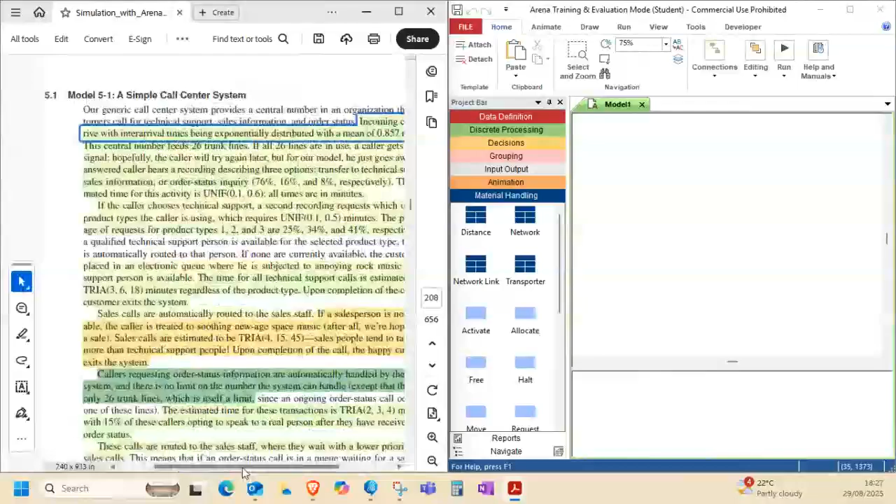So now we have what? Incoming calls - that's your arrival of products, create. And then these incoming calls arrive with interval times that are exponentially distributed with a mean of... So now, immediately I want to introduce something.

I want to start introducing expressions, whereby this is the expression in time. So now it's going to be in calls time - I'm introducing variables now. This is going to be calls time, and then your entity type is calls.

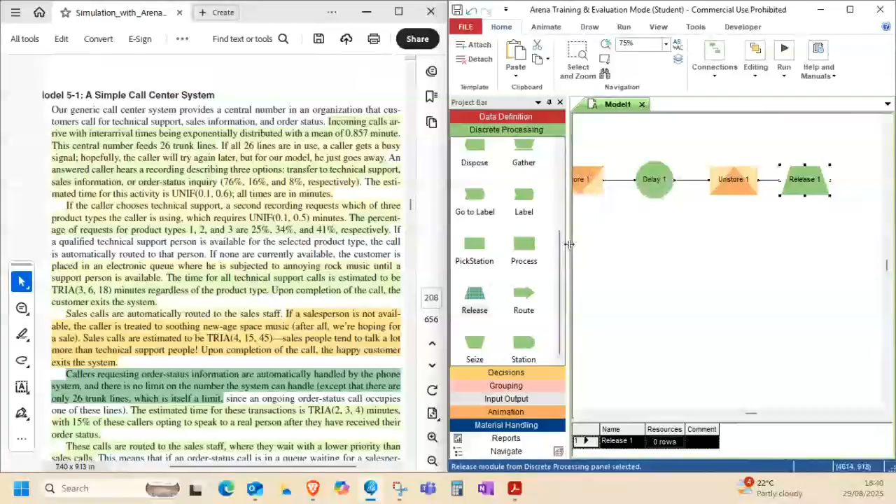...the entity so that it can move, or the resource so that it can move along. Okay, so now the system looks like this now. The system looks like this.

So now we seize the resource, which is the recording, and we're obviously making the assign, meaning usually they even change what they are assigning to be the work in progress. So they're going to assign the work in progress variable, and after that you actually don't need to depict this. You don't need even this assign.

I think it's pretty much over for now. But you seize, then you have the store, you store and you delay by playing the recording, and you unstore the choice the customer makes, and you release the resource, meaning release the entity so that it can go elsewhere. So where does the entity go?

The entity is going to, this section 76, 16, 8. So the entity is going to go under a decision.

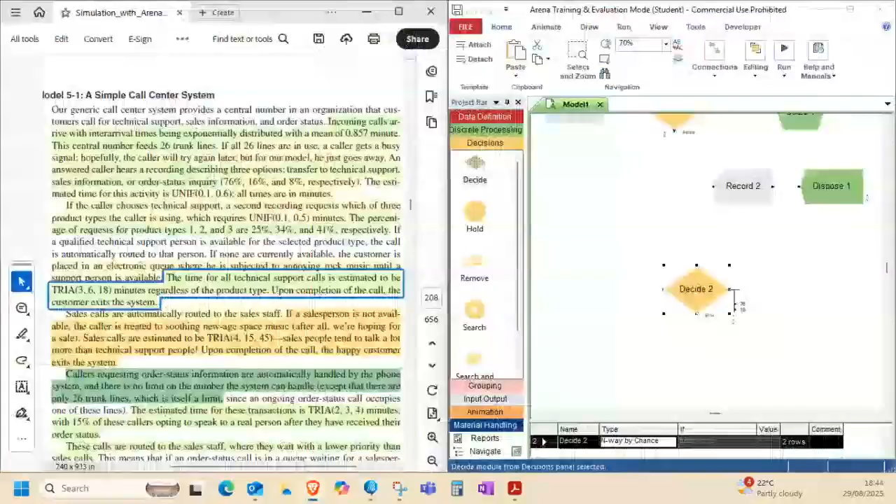Okay, now I need to be able to project to see and visualize how much you are seeing, because now our system looks like this. So we are going to connect it now. Connect to that, and connect there. So you see now we're going forward, and now from release we are going to this decision.

That's a decision we're going to next. So now I'm gonna go a little bit below like that, then I'm going to zoom. So we have this decision. We've only added this information. We never added anything there because we are reading now, we are just reading the question.

Once you can't come up with the flow chart, not that I'm gonna make it a difficult flow chart, once you can't come up with the flow chart, we are really in trouble. You need to appreciate that very quickly. Then now, after that, we are here.

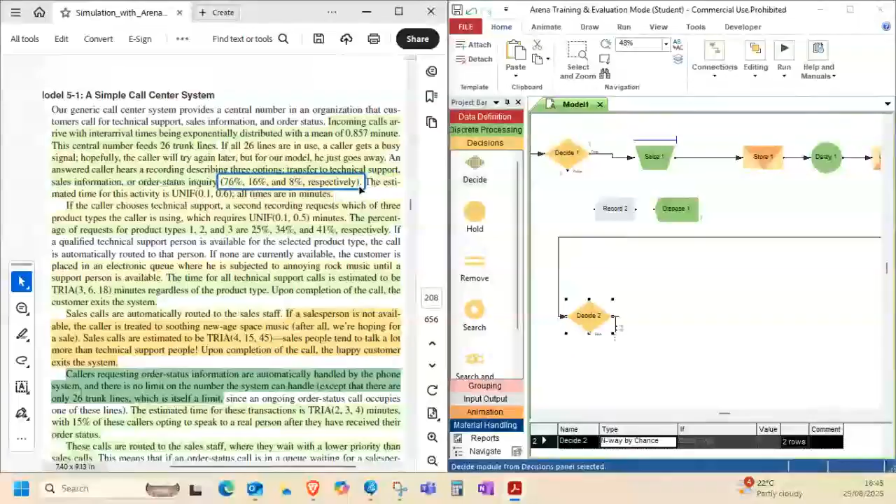We are going to, what is this process? The estimate time for this activity is uniform 0.1, 6, and 0.6. That comes here, it's this time here. It's going to be in minutes, you take uniform there.

0.1, 0.5, and okay, then the percent, okay, 0.1, 0.6. It's easy to make this mistake. Because you don't want to go back and forth, then it's best to fill it up like that.

Then you want to know something, that if the caller chooses technical support, I guess they're being delayed here and they're making a choice. That's why we are storing the choice that they're making, and we unstore it as soon as they've selected so that somebody else can make the similar choice.

If they select to go to technical, now there's another one. If they select to go to technical, then which of three, okay, if the caller chooses technical support, a second recording now starts. You see, so we are starting the similar sequence of event like that one.

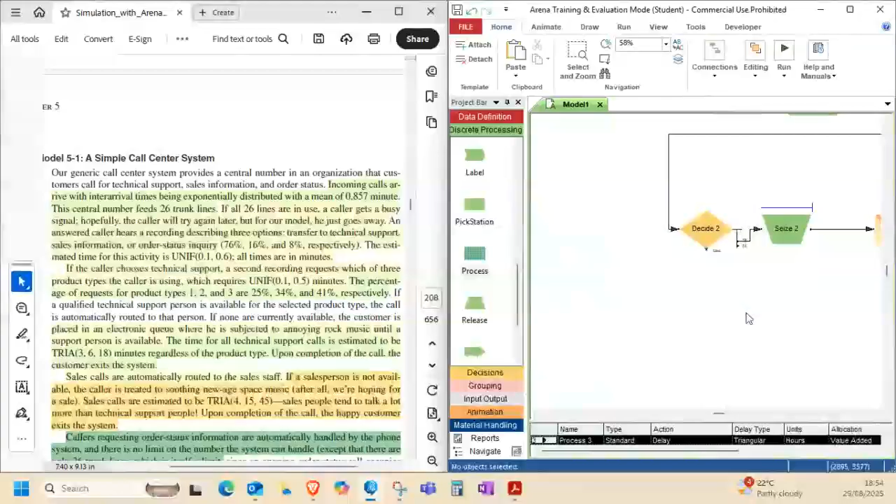Then we need to go to somebody else now. This one, 16. Agree, this one goes with that. This goes with this. This goes with that. Okay, now we want to go to the salesperson now, which is 16.

Salesperson, sales calls are automatically routed to the sales staff. If a sales is not available, the caller is treated to a soothing new-age space music. After all, we are hoping for a sale.

Sales calls are estimated to be in the triangular distribution of 4, 15, 45 minutes. Salespeople tend to talk a lot more than technical support people, those ones that just want to get the problem solved.

I agree, you want to just solve the problem, so we need to get rid of you and go. But under sales, we must give you an upgrade right there to tell you the features and stuff like that. We lie to you until you buy, and we add another watch on top of your phone, saying take your watch also. So make sure you don't go home in peace, you must buy something extra on top of that. So they need a lot of time.

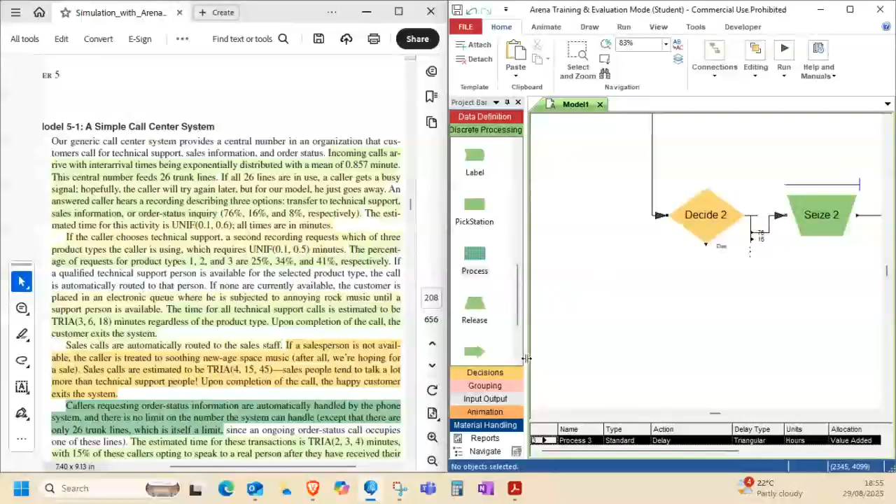So these guys now, ideally, you see it as something where you're just going to take a process. So you can jump this process. Let it jump, so we unzoom. It's going to jump there, so this process is going to jump there.

It's because we are given time here. Before we forget these times, you see we're having the triangular time for sales calls, sales time now, and we have technical time, we're going to have a problem. So they said this thing is triangular 3, 6, 18. Then the second one, 3, whatever, 18.

You can tell that this is not going to work. But if you were to do this, then you say this is going to be my tech time. You are able to enter all three of them and give them the tech time. Tech time, tech time, tech time.

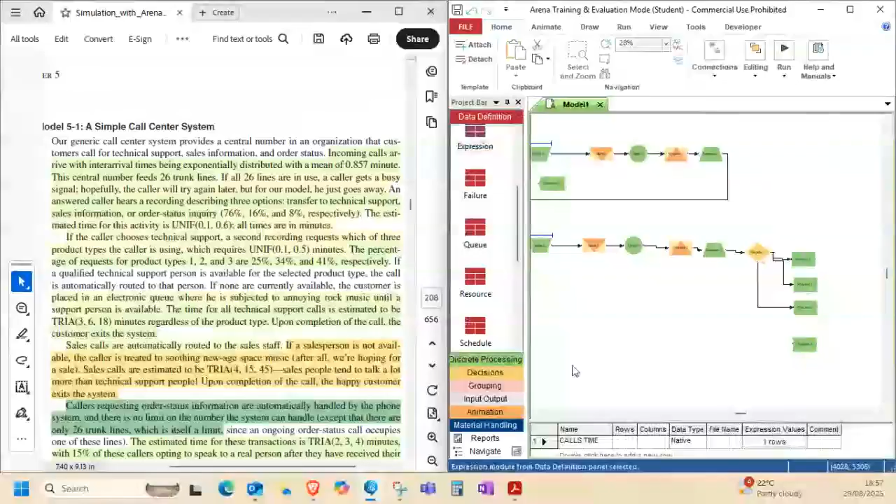Then this one is going to be sales time. Give them a lot of time. But this is not where you're going to write your times. Remember earlier on, I introduced expression. Now we want these guys to come here, the tech time and the sales guy, the sales time.

So now we were just writing tech time only once. Tech time. The spelling is imperative that it must match. If it doesn't match, you're in trouble. Then that is your triangular, open bracket, with the time 3, 6, 18, close bracket.

Then this one is going to be sales time, 4 minutes at minimum, 15 at average, and then 45 maximum. And these are just time estimates. They are not saying that if the time goes above this, you're going to hang up the call.

At the end of the day, it's about the sales conversion. Sales time. And now you know that the tech time, they are using the same time. The tech time is the same. The tech time is the same.

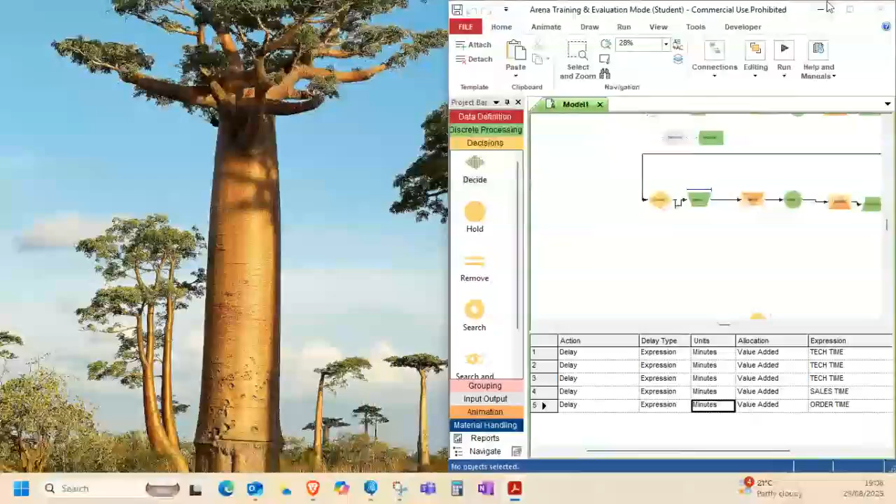Then we are being informed now there are 4 salespeople, so you go under resources - this I can immediately remove. We are being informed that under resource, we have sales - this is sales personnel. We're gonna leave it as sales. There are how many? There are 4 salespeople.

4 salespeople. And under the product types, remember we had 3 product types. Type 1 call - type 1 has how many resources? Have 3, have 2. And then type 2 has... type 2 has 3 calls. Okay, so what are they saying?

That over the course of the day, there are 8 technical support people. So already we're running at 5. Then obviously type 3 is going to be 3 also - type 3 is going to be 3 personnel.

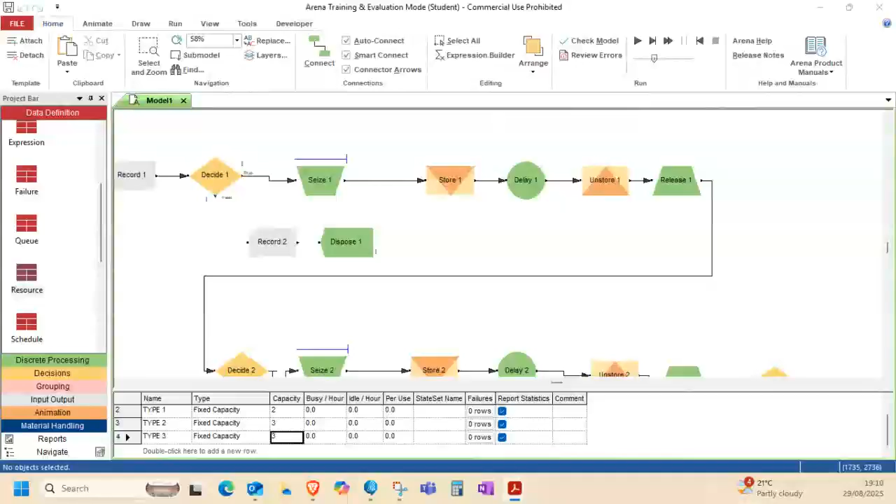So another important aspect here is the 3-way decisions that they spoke about. You can read that on your own, that's not a problem.

But what I want to reiterate is the variables and expressions. I'm introducing variables and expressions in this. In many models, we might want to reuse data in several different places. The reason why I'm capturing through expression is because I want to be able to reuse data.

Imagine, for example, I want to edit this time. This time here is the same time, they're using the same time. Instead of editing it 3 times, I go to my expression, go to tech time, and edit this. Immediately, the tech time is going to be affected across the board. So if your process gets bigger and bigger, you are able to change the time at a much faster pace.

Now, for example, in our call center, there will be several places where we need to enter the distributions for the time to handle the technical support calls. If we decide to change this value during our experimentation, we'll have to open each dialog that includes the call time and change the value, and you don't want that.

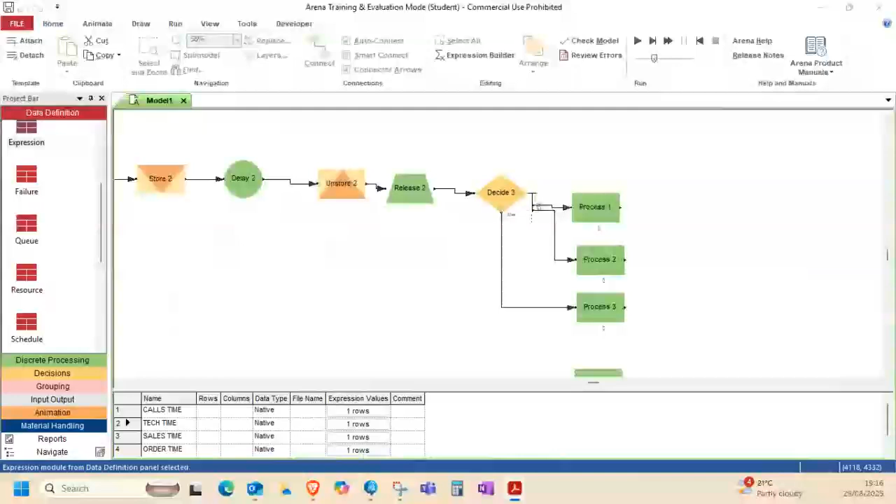And the first thing you come across is the diagram, and the names. With this, you can almost fix your diagram. The nice thing is, whenever you work, you want to be safe - look at how often they say create call arrivals, record all attempted, seize trunk.

It tells you what type of module is there. This thing is called increment. This is assign, based on the shape. This is a store. This is an initial recording delay. This is unstore from initial recording delay. The record rejected call. Dispose of rejected call. You can almost tell what is happening, you can almost tell, oh okay, this is what they are. Whenever I use something, I need to start with it, like delay and stuff like that.

When you take longer to prepare, when you need to deliver and you deliver for longer, the body tends to give up on you.

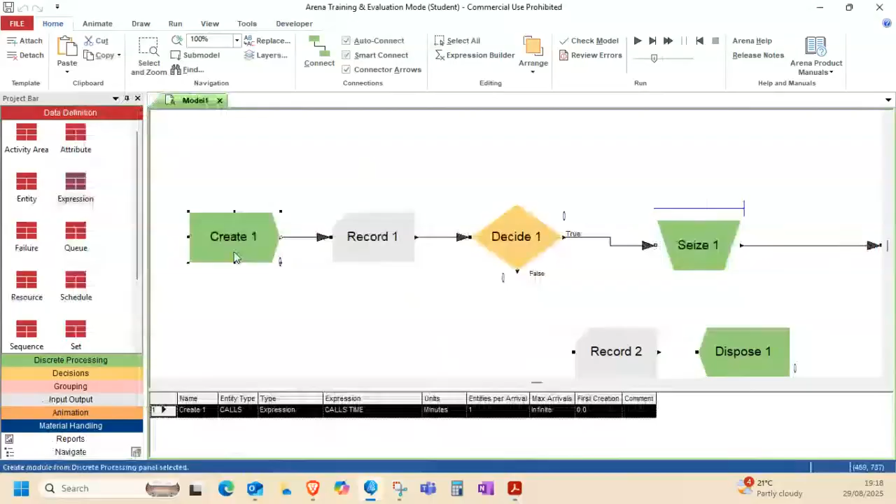So now, number one, we're gonna go. Now we are building this. Now we need to be on stealth mode. What are we creating? We are creating call arrivals, and then entities calls.

Expression already is given there. We are...

I want to say something. I don't know why I didn't highlight this part. They say here, they say here, we recommend that you lay out your complete logic before you start filling in the details.

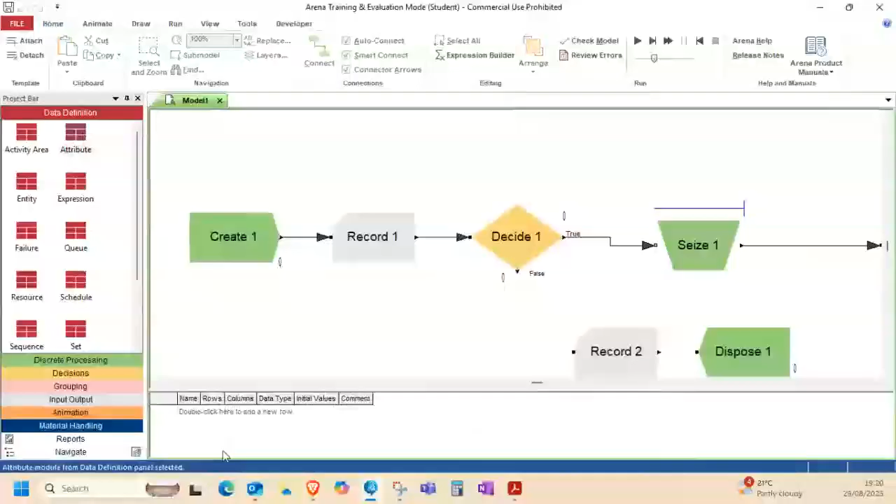And you can almost put those minor details that are there. You know what that will do? If you, because I know students, you forget easily. That's why when you submit, I won't say give me tables. I'll do the tables myself, because I'll know that under entity there's this, under expression there's this, under queue there's that, under resource there's this. So, but I will definitely know. Even variable also, when you need to use a variable, I will know what is happening. I'll definitely know, and I start marking.

Even if, like as I said, the work must have a lot more marks than the simulation itself and the reporting. The reporting you're gonna match in your assignment.

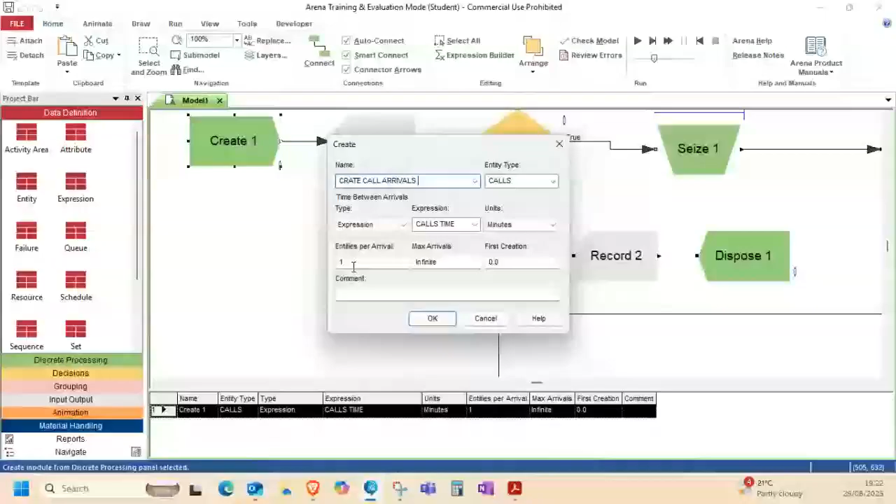And then there's this one that is very interesting. This is going to be a variable. We are teaching you a variable, it's very critical. So this is going to be calls per arrival, entities per arrival. Calls per arrival. Spelling. Maximum calls is going to be max calls. We start at 0.

This just names that we need to use somewhere. Where are we going to use them? We're going to use them under variables. Come under variable. Unfortunately, it doesn't recognize it as a variable yet. However, once you say max calls, and it says real there, real data, meaning that it's an integer.

It only takes 1, 2, 3, 4, 5, 6, 7. It doesn't take 0.0 something. So max calls is going to be 999999, meaning that we don't limit them for the number of calls they can have. You understand, it could be infinite, but a variable cannot be regarded as infinite, so we need a number. So it's a million, we know that there's no way they'll reach a million.

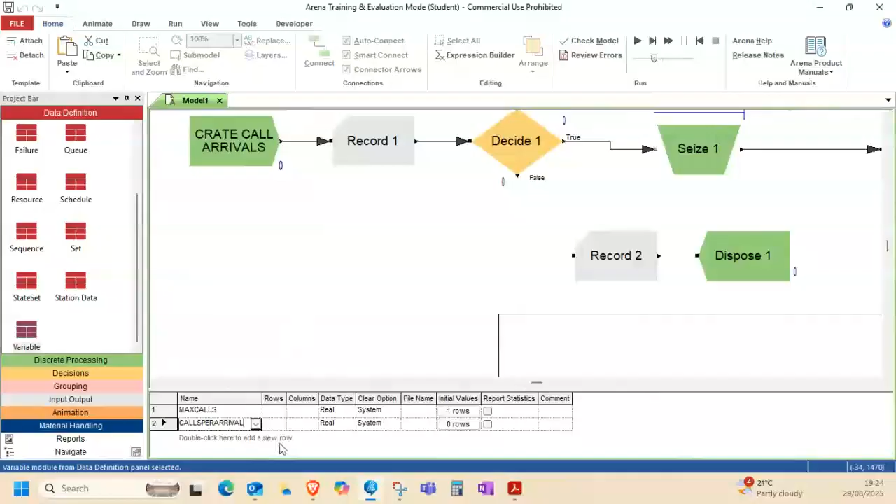Then this one is: calls that arrive, the time must be 1. Calls that arrive, the time must be 1. So this is how they demonstrated the use of variables. And now you can tell that variables and expressions are totally different.

Under expressions, we are able to utilize our expression. They still say calls time, tag time, sales time. However, look at the call time, it's expo, and it's a 0. It's a distribution. You cannot go under that.

Let's say you want to take the calls time, you make it a variable. Variable calls time. You see now already even there it has a problem. It says no, I don't operate like this. Then you say okay, make it that. You see now it agrees. It only wants words that are similar to this one.

Then you tell it that okay, I want to say expo 0.5. Even if you say whole number 5, you see immediately it doesn't allow you. It won't accept this, it tells you that this is wrong.

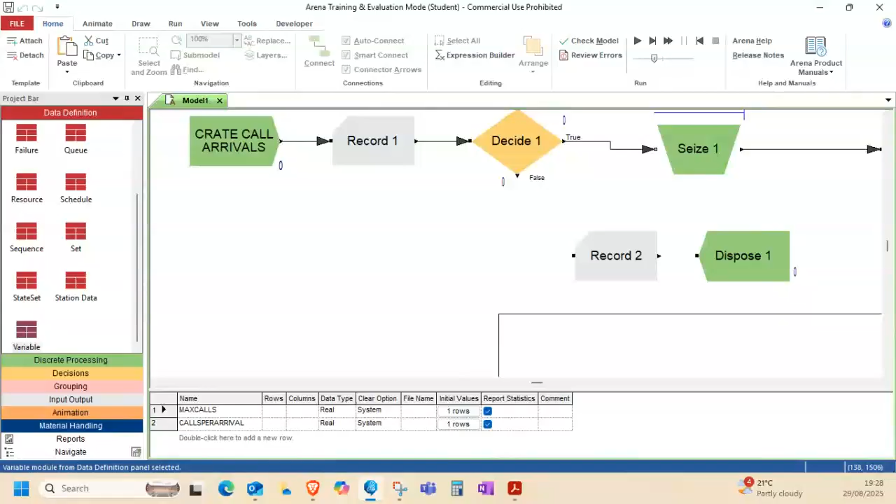It says remember that the system closes to new calls after 6 p.m. But remember, when it closes calls, it's like at the bank. I'll make an example of the bank, and also it's a possible test question, the bank scenario. At the bank, just because the bank has closed, they don't say 'hurry out' - they assist you. At the clinic also, which is another possible scenario, they assist you even past closing, but they never receive new patients.

They never allow any new walk-ins into the bank, guys. Keep that in mind. Don't allow new walk-ins. A nice example, this one - it has potential for a test, both scenarios.

I don't want to read too much. I want to read the stuff that I highlighted. I spent 5 days reading this, I cannot read it again. This storytelling of these people - not nice.

Therefore, we need to define a variable, max calls. Next, we need to type the name of our variable, which is max calls. Then click on the initial value cell to open the spreadsheet window where you can enter the initial value. We entered a value of 999999, almost a million.

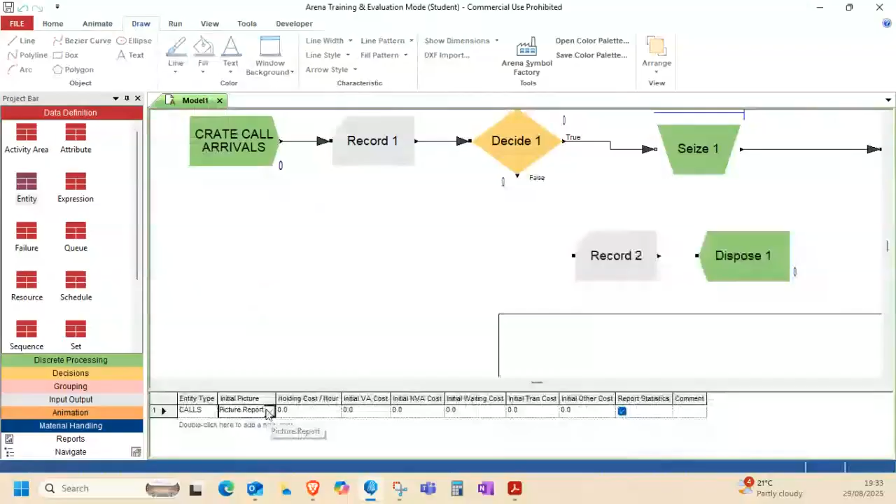So I'm going to copy the blue ball like this, and I'm going to make it my black ball. How so? Then I need to edit it by double clicking on it. When you click somewhere, sometimes it doesn't want to listen to you, so you need to right click and select all. Then you go under draw and fill it, make this to be black. Then you click this, click OK - and the spelling matters also. We'll take the blue ball first and edit it slightly. Black ball, like that.

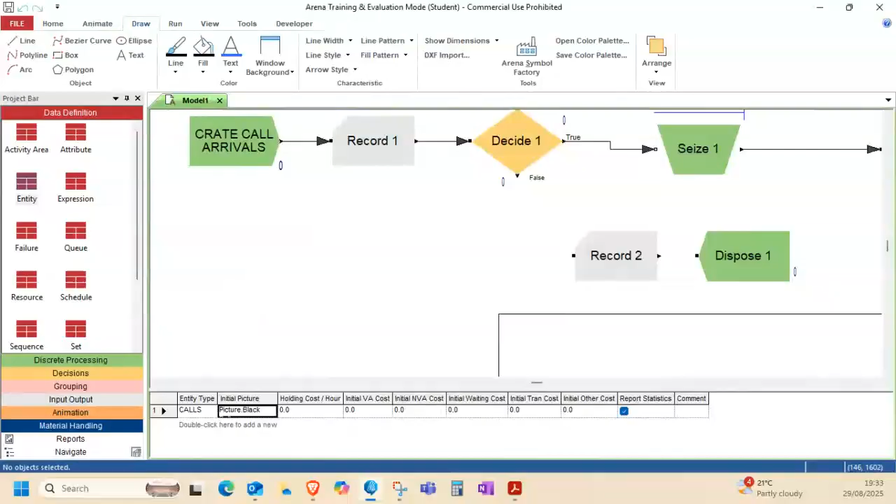So now we are required to record what? The number - record all the attempted calls. Then you add this, then the value is 1. You count 1, 2, 3, 4, 5. The number of what? Attempted calls. Like that. Okay, then now we're going to select, we're going to decide for the first time.

We're going to decide for the first time. Here, what are we deciding? Is the trunk line available? Here's a question - is it available now? So we're going to make this what? And you'll find this thing by default at two-way chance. You must change it to two-way by condition of expression. You have it as a variable, whatever that you have there.

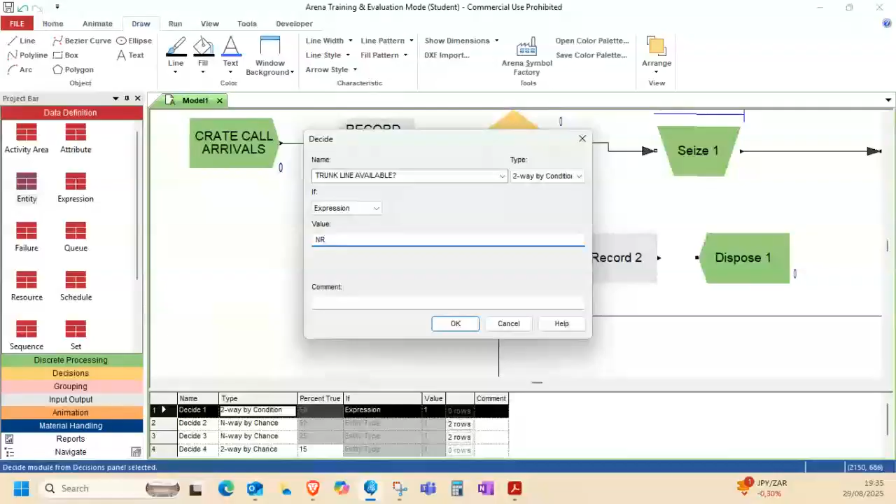No, let's read first. NR stands for the current number of busy units, meaning busy resources, and the variable MR is the current number of units scheduled of the resource. Okay, so now the number of resources currently being used, which is 1 to 26, must be less than the total number scheduled, meaning the 26 scheduled.

And this we can see that it is also what? It is also a variable. Then you go back to this thing. Number of resource busy, which is the trunk line, should be less than the number of resources available, basically - of the line. If you go beyond, if you have 27, you start dumping.

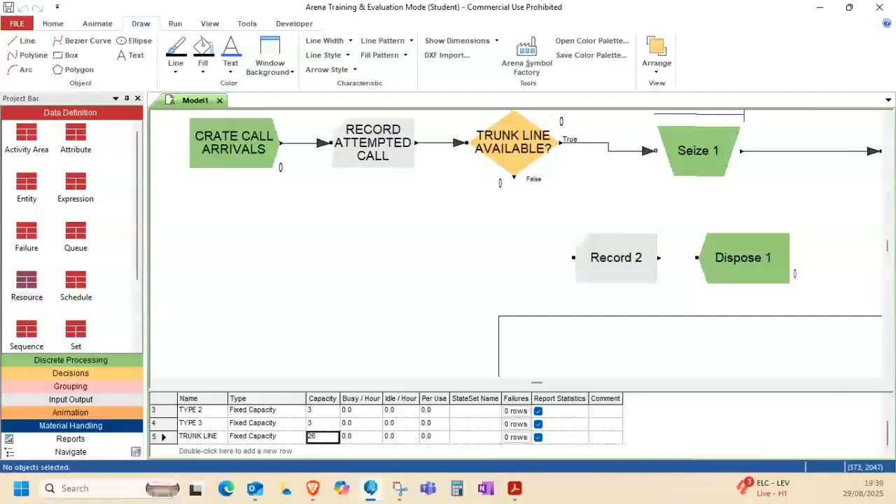Let's address this part. Record what? What do you want to count? Rejected calls. Dispose what?

Now, we have the seize. What are you seizing? You seize the trunk line.

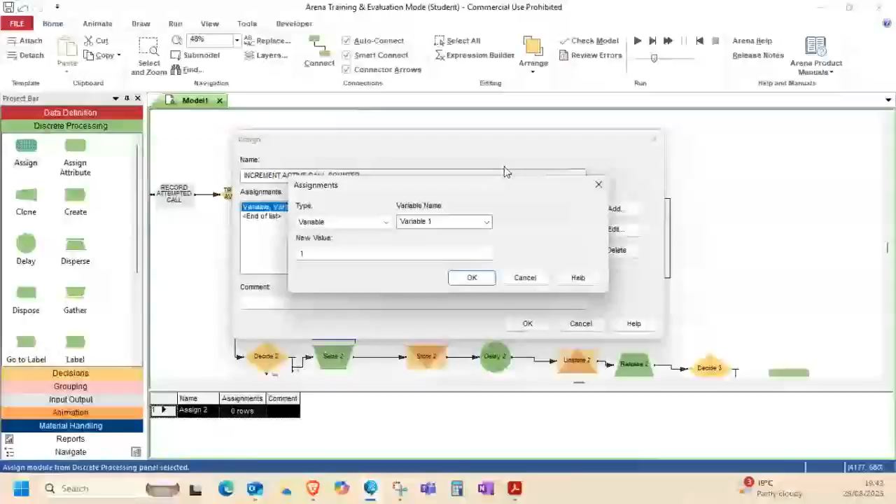Active call counter, and it's going to use a variable. The variable name is going to be total WIP. Now, total WIP plus 1. So the total WIP initially is 0. And once the first call comes in, it comes 1, 2, 3, 4, 5.

These are successful calls. This one here is going to record all the rejected calls. Then this one here is going to be recording all the calls that managed to get into the system.

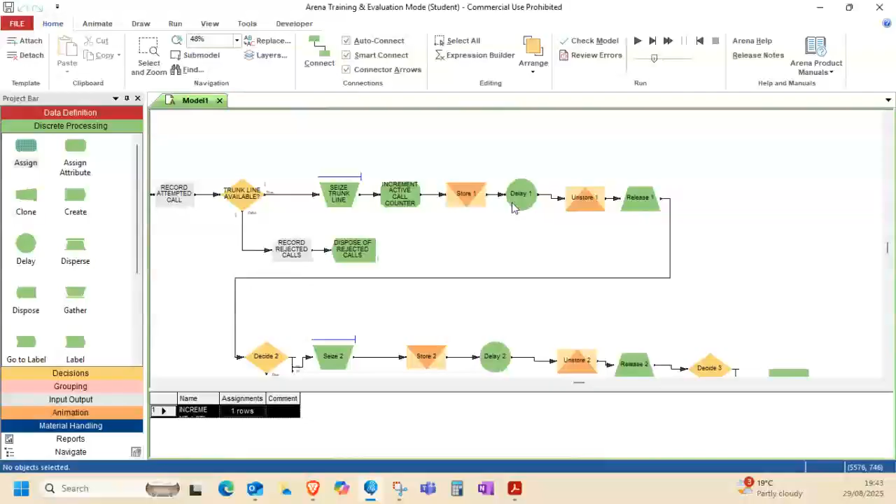This one, you must read on it. We are storing - store for initial. So this is when you are listening to the initial recording. Recording delay. And we have this as initial recording delay.

And you move right along, and you have a delay of a process time now, a process initial recording delay. Then you have that.

It's already done for you. Oops. Why does it say it has this name somewhere? It sucks, but it's fine. We've been opening this thing for the whole day. Maybe if we do it like this, it'll work.

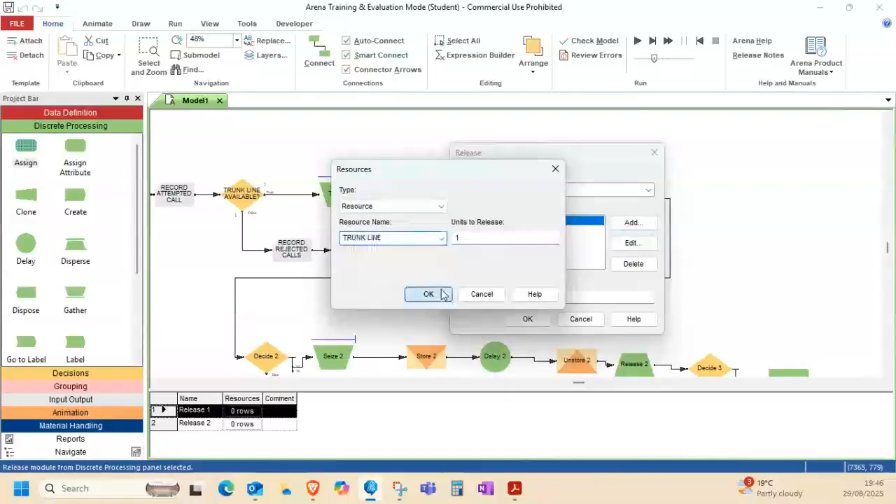You must go read on the store and unstore of things, because you might need to use it when you speak to the doctor at the hospital. Or there's a person when you get to - there's some sort of a receptionist even in the bank.

So now we have to determine now this. We're here. We didn't add anything. Yeah, we are there. So it says the call is sent to a decide module, whereby we select the n-way by chance type. The specified percentage is 76, 16. So we have done the 76, 16 there.

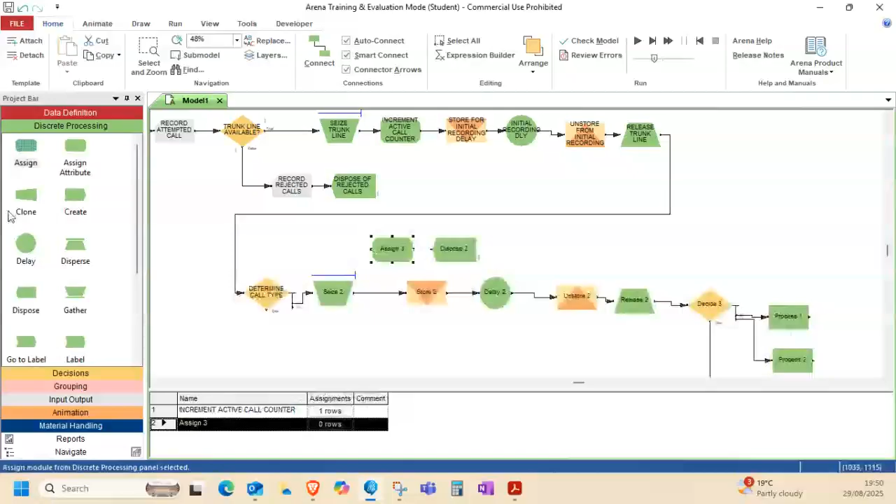So in this create, we have what - we remember that the system closes to new calls after 6 p.m. So we're going to show you how to use the variable that makes calls to terminate the call arrivals in the next section.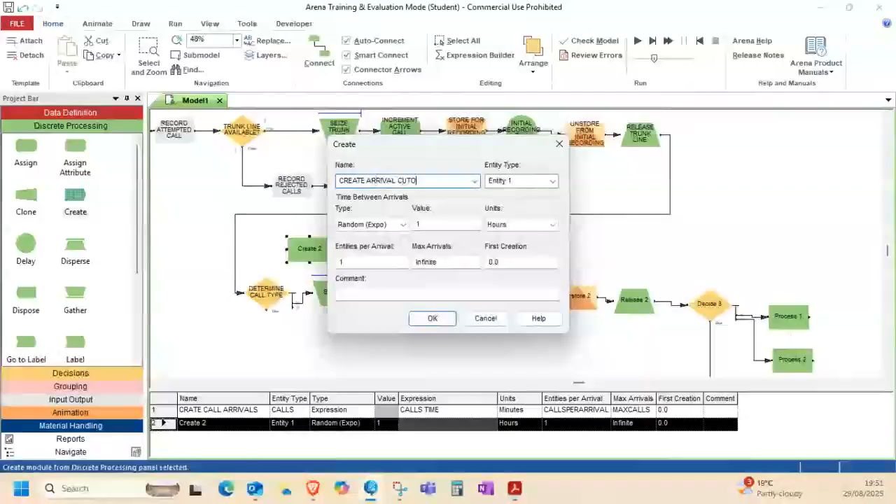That's called arrival cutoff logic. It's going to have this: create arrival cutoff entity, and get cut off, and the arrival time. I need to confirm that. I want to read and confirm.

What they are saying is we indicated that the system closes new calls after 6 p.m., but all calls that entered the system before that time are answered and processed. This means we allow calls to enter from 8 a.m. to 6 o'clock, a total of 600 minutes. That's 8 hours multiplied by 60, you get... actually 10 hours, from 8 to 6, we get around 600 minutes.

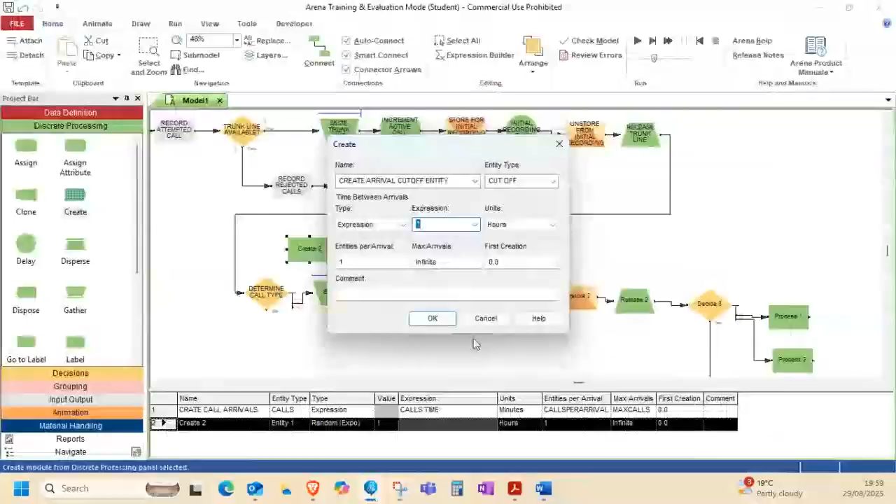That concept of filtering the number of incoming calls beyond a certain time - what you need to discover, we'll just say okay, either it must come here, or I think it might need to come here or here, because you need to record all the calls before you end it. One thing I'm not sure is whether you can also create this, so you must test both scenarios - putting it here and also putting it here, that decision.

So now you know - if I figure it out by myself, it's in the test. If you figure it out by yourself and I don't figure it out, you are safe. But you need to practice it until you figure it out. The approach they're using is obviously tricky, and my aim is to simplify the test. That's why I'm considering this method, and I'm giving it out like that as your potential scope.

Okay, so now where are we? Only for this exercise, I need to bring up the book and we do it together step by step, that method that they are suggesting. It's going to be strictly focused on these 3 steps, these 3 steps there.

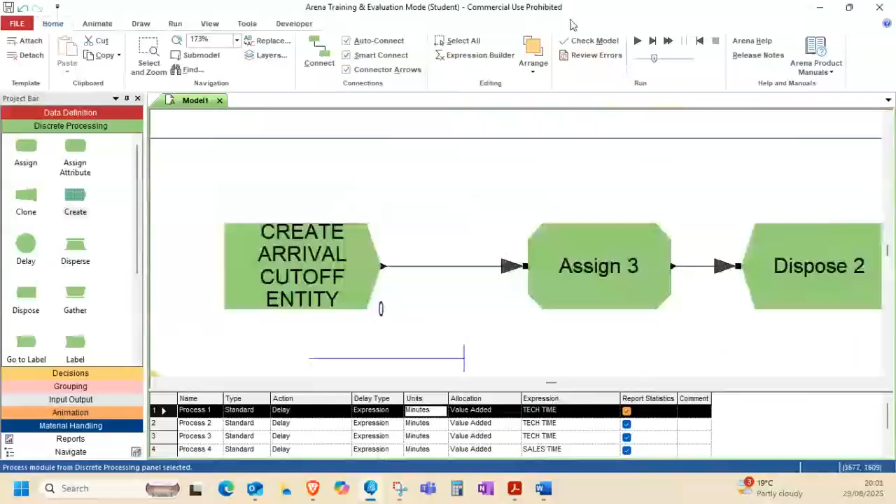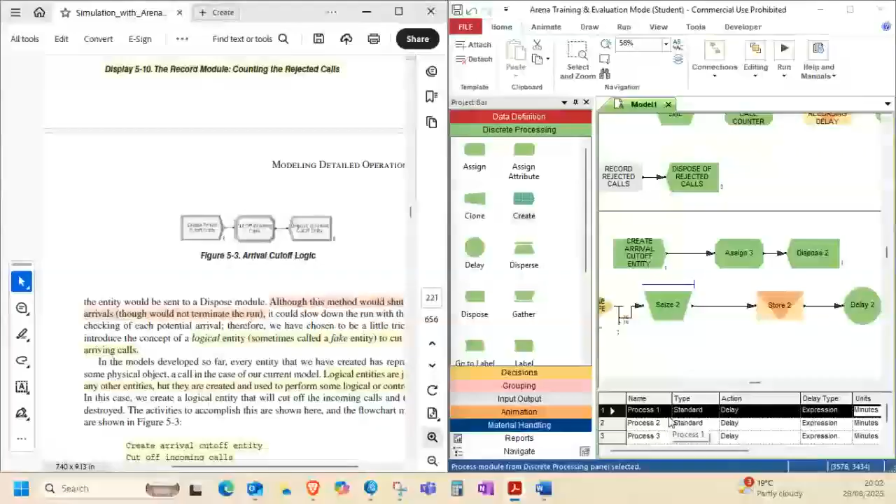They say now they're introducing this method, yeah? Which I don't want to put as a test, I don't want it in my test. I will inform you once I figure it out, and I won't show you how it's done because it would be like I'm showing the test. So you must go figure it out also yourself. If I tell you that I failed, then we are using this method.

Okay, what they're saying now. In this case, we create a logical entity that will cut off incoming calls, then be destroyed. The activities to accomplish this are shown here. The flowchart modules are shown on 5.3, which is this.

We have dispose of entity, dispose of entity. Then we have this assign, which is cut off incoming calls.

What is it going to be? They expect that this section of our model will interact with the rest of the model via two global variables. We start by creating our control entity with a create module. We've specified a constant arrival type with value of 999999.

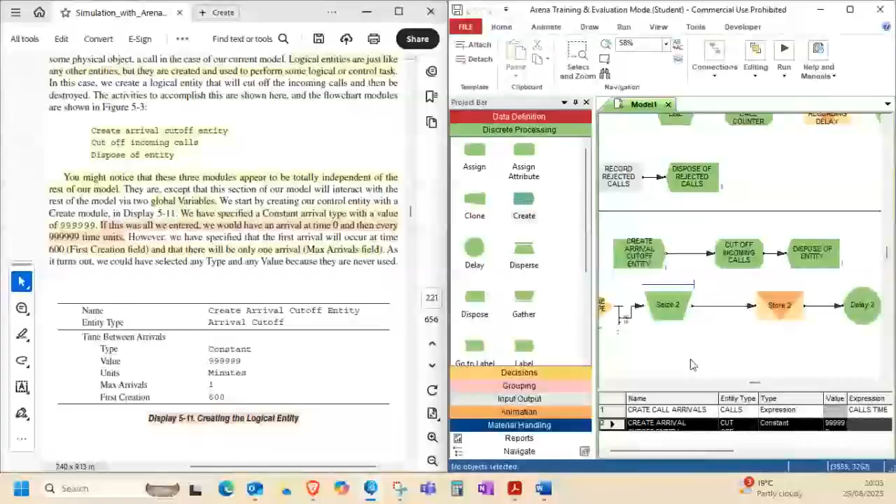The cutoff incoming calls, the assign. So it has a variable called max calls. Max calls is there already. And then the maximum call you are also given, it's 1.

However, the calls per arrival, it cannot be 1, meaning that it will allow new calls to come into the system. Calls per arrival is going to be 0. So it destroys every call that is coming. Click OK.

Then the system should be done. Then we read here what they mean. The single logical entity

at time 600 enters the following assign module, where we assign the variable max calls a value of 1, and the variable calls per arrival a value of 0. By setting the value of the variable max calls to 1, we have stopped the creation of any new arrival calls.

We'll start with this information. The type of entity coming here is that one. It's a black ball. I believe here also we should use the same. I can go to entities. And we still use what? The black ball.

Okay? Because we don't want it to differentiate. Although it's very important that as we move along, we change the color of our entity as it gains value. This would be a scenario of a manufacturing plant. You know it comes as a black ball, it comes out as a red. You understand? So this is what it's all about, basically.

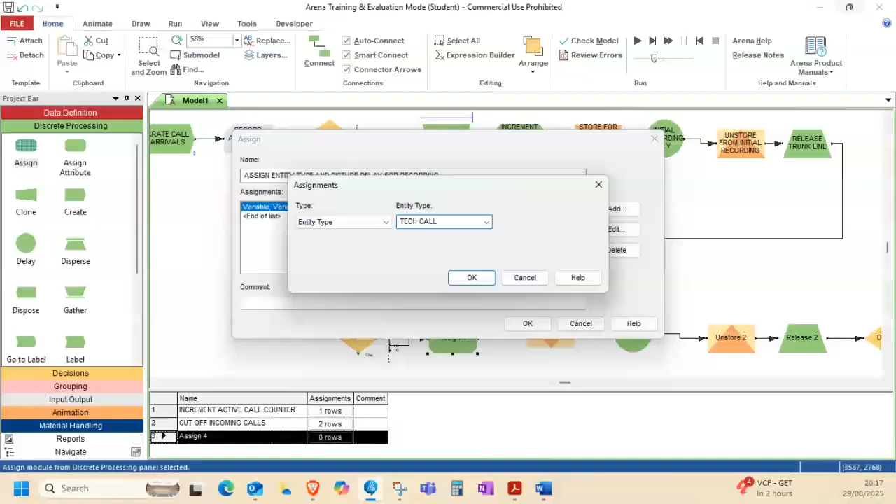So the book states that we have assign entity type and picture, delay for recording. Assign entity type, which changes now to be tech call. You see that? The call was initially your incoming call. Now it has changed to become a tech call. Then all of a sudden we need a picture.

We need this maybe to be, let me be precise, a red ball. Then I store what? Tech, store tech, store for tech call recording delay.

And the type is storage. Then the name is tech call recording delay storage. Okay.

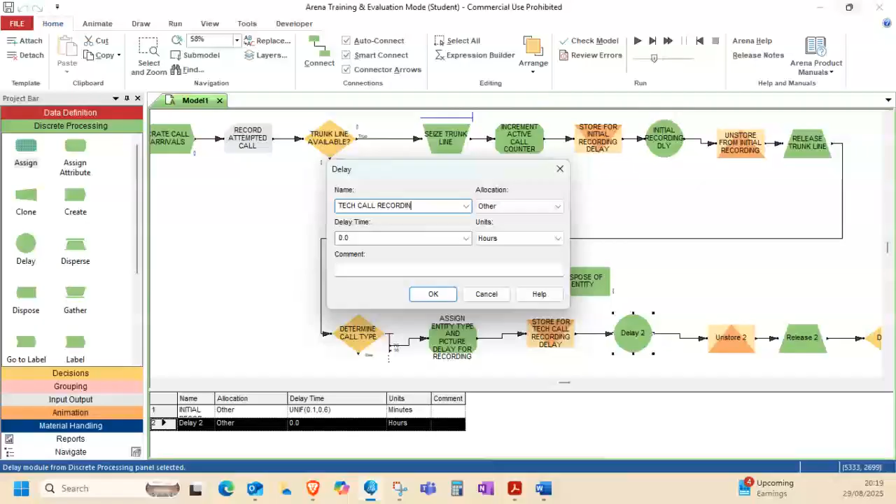And then your delay now, tech call recording delay. The time is in minutes and it's uniform, 0.1 and 0.5.

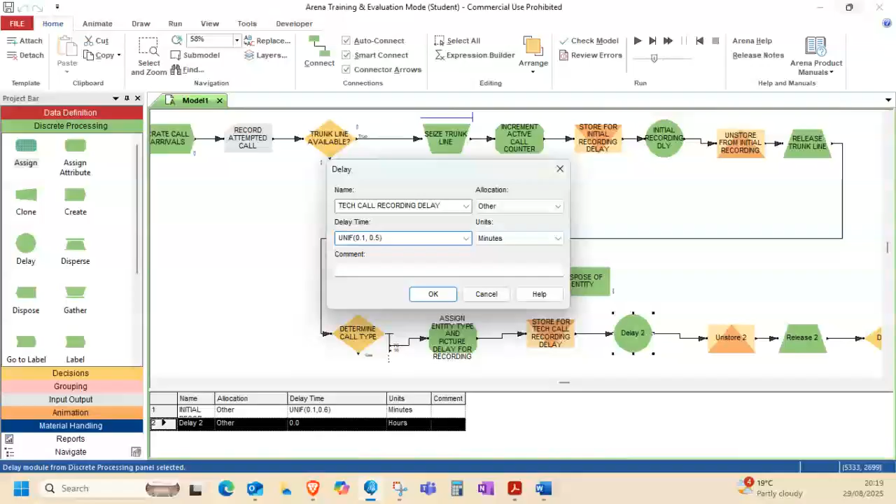Then unstore, unstore from tech call recording delay.

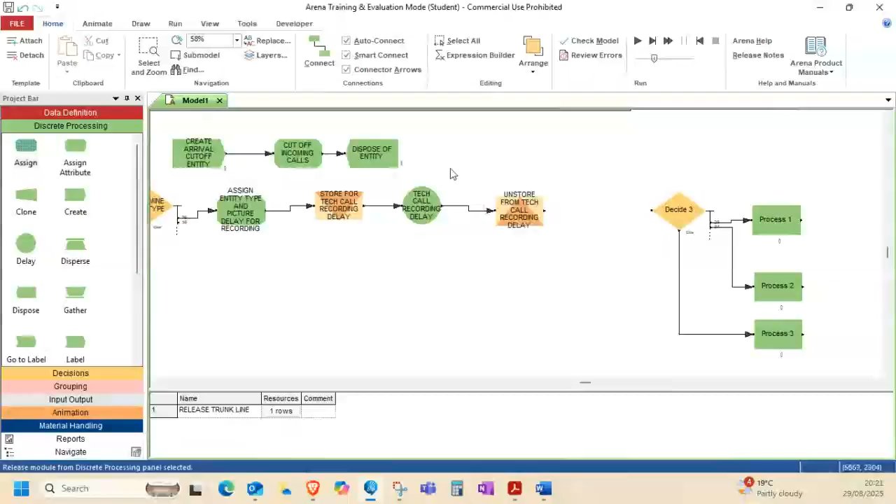So now seems like I do not have the releasing of this. It only delays, but it doesn't release because we don't need to release since we never seized. Because if we were seized, we were gonna seize what? We were gonna seize the resource, and the resources are only selected after here.

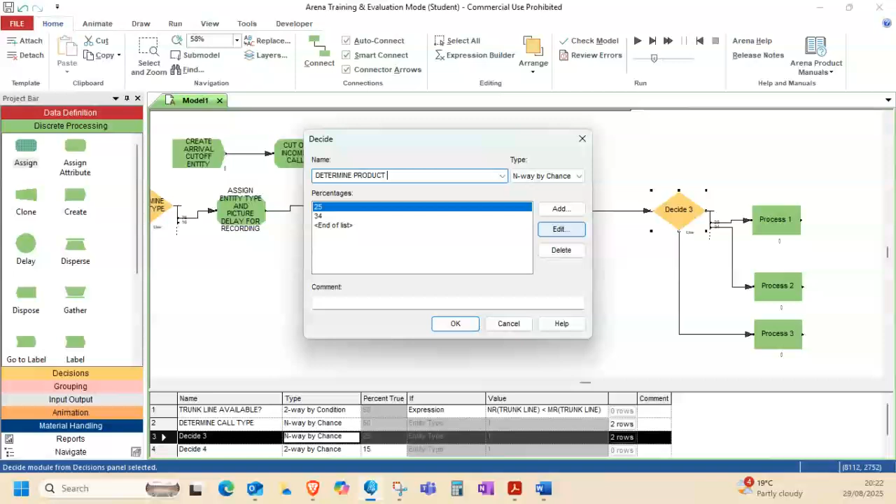So now we're going to say determine product type. Click OK. Due to the activities we have conducted before, we are able just to cruise nicely, edit, and just move on. It becomes a lot easier.

And now we're going to process. We have the entity type, right, that determines the color that we're dealing with. All right, it's perfect. Now we are here. Process one. We are processing what? Process product type 1.

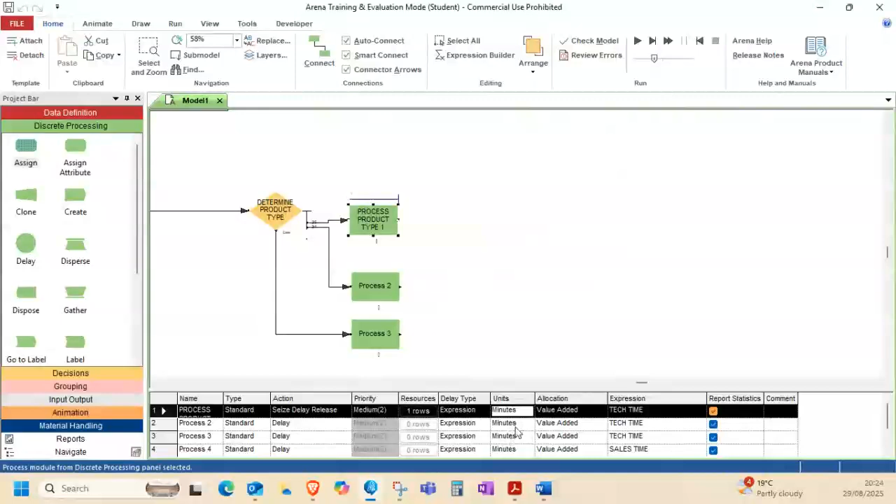Then delay, this is delay release. What's your resource? Type 1. Click OK. This one is tech time, we'll leave it like that. And as you can see, these are all in minutes, so we're going to move with that sequence.

Process product type 2, tech call and add. Because we have done these things, now we are able to utilize them. Click OK.

Process product type 3, tech call. Mind you, I always say this, your test won't be this long. However, invest time in the data capturing and the process flow. Aim is to make you pass, but you decide the fate.

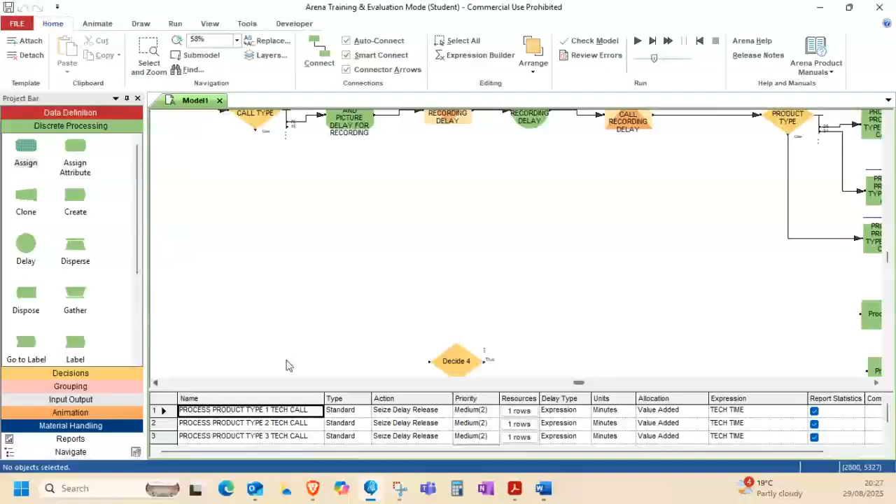The sales guy, give him the picture, assign the picture to the sales people. Place, assign, there, and connect it. There is 16 there, and connect it there.

So now we are assigning what? The sales entity type and the picture. Assign sales call entity type and picture.

Add. What are we doing? Entity type. Calls. Sales. Where is the sales now? Sales call.

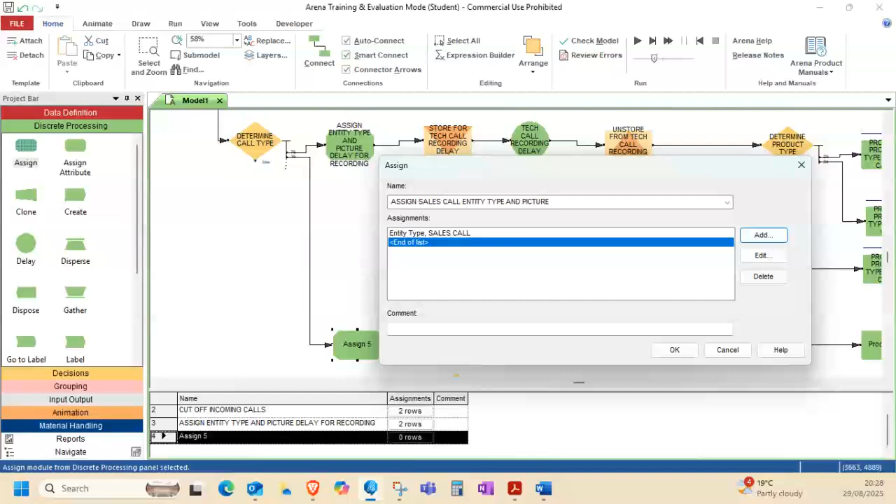So we are changing this entity now, its name. When the entity comes, it came as an arrival call. So now we are saying now you are becoming a sales call. This is what it means. You're becoming a sales call and you have a picture and you change in color.

Then we take green ball. And process 4, everything is done. We do this, and then we add a resource. It says so.

So now we need to process sales call. The resource seems to be correct. Okay. The sales time already dealt with it under expressions, as you can see there.

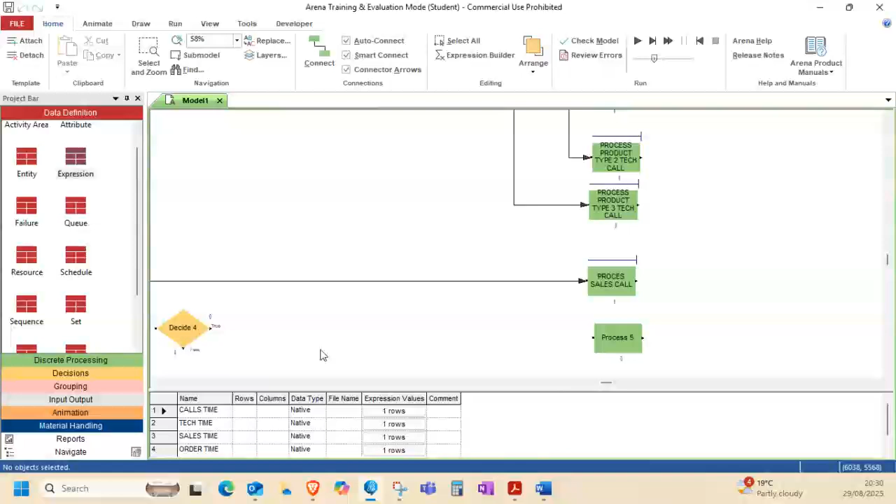Last but not least. Yeah. We have order calls, order status calls. Whereby we're going to assign a blue ball for it.

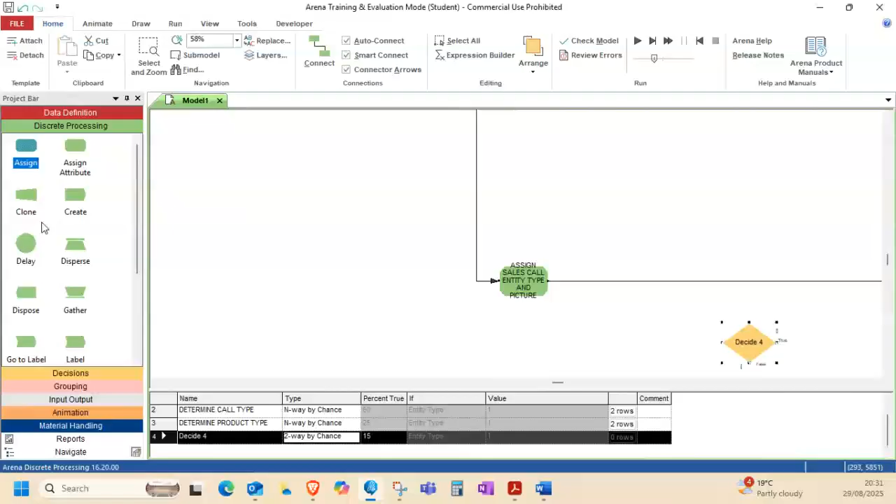Assign order status entity type and picture.

So the entity now becomes an order call. A patient that is there to see a radiologist or whatever the case, we'll see. Or I am here to see the bank manager.

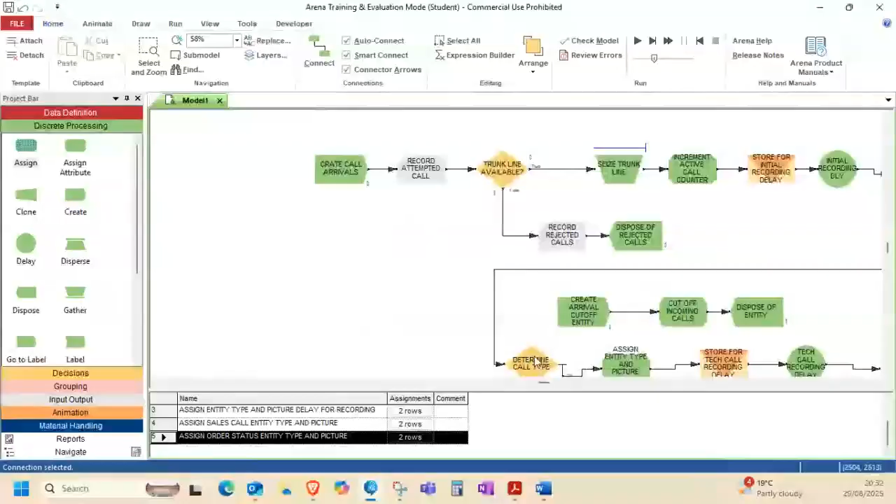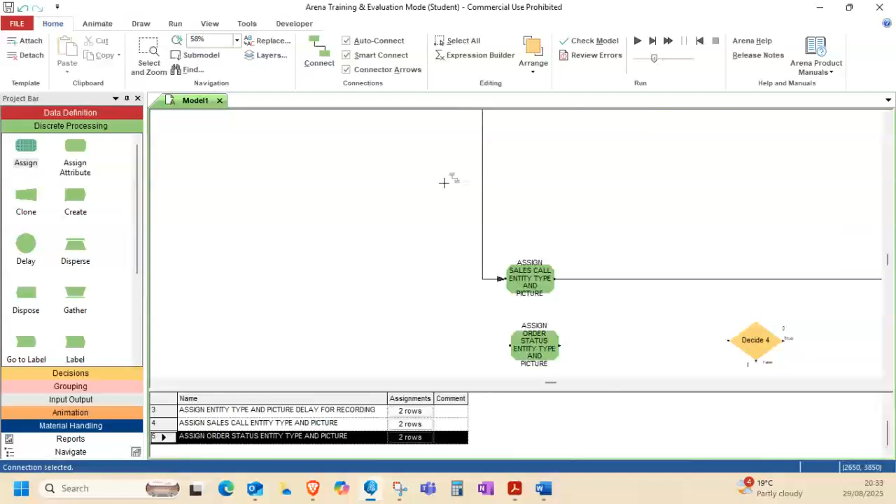Add entity type. Order status call. Then this one comes from the top there. Here. There and there.

So now there's a decision that we need to still take. We need to decide whether we want our order status call to be handled by a human or a robot. We have that option.

So we're going to delay first. I need to read first. The order status calls are handled automatically by the phone system, which means they initially incur a delay like the arriving and technical support calls. As with the previous two delays, we want to show the call on animation so that we could use a store, delay and unstore module combination, like we did in the first two delays.

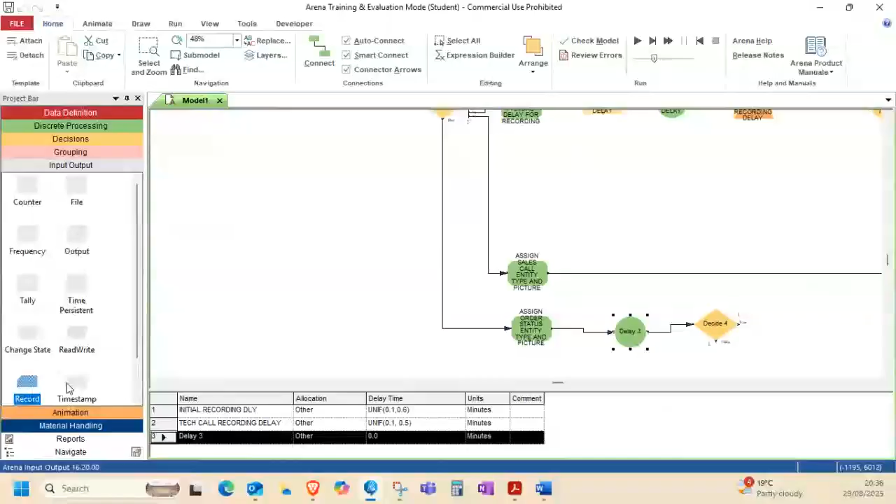I don't have those. This is the only storage I have. No. There's only one delay. This is the delay that we have.

So by the look of things, we need to put all those in things to store and unstore whatever, because you're given an option to choose here whether you want to go ahead with listening to this thing online or you want to use human beings. So you will do that on your time. So this uses uniform.

Order status delay. Two comma 3 comma 4. And then you choose now.

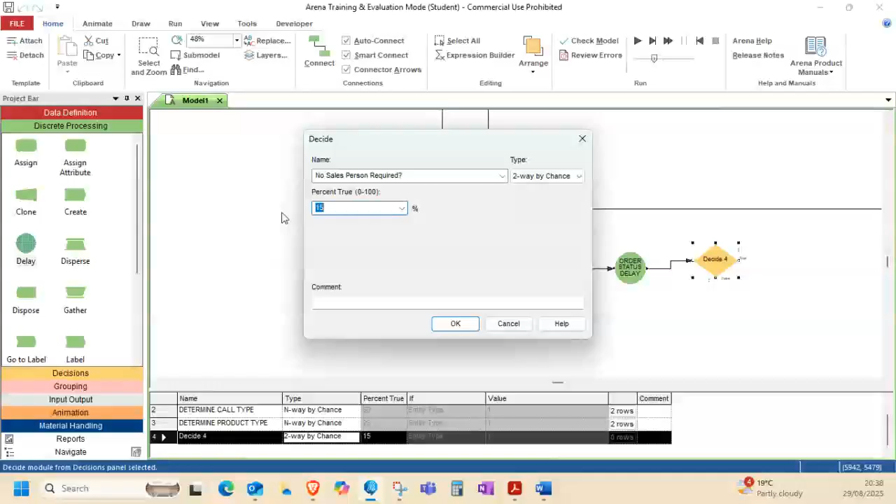So if you don't want, no salesperson required, meaning you're saying no salesperson required, then you're gonna say 85%, meaning 85, we don't need to be assisted by a human being. Then you're going to dump that. So if you want to be assisted by the human being, it's going to be how much? 15%.

So we're going to be assigning the priority. So the priority goes like this. I did talk about the priority, man. I believe so. This will be called.

In our initial description, we indicated that order status calls are routed to the sales staff where they will wait with a lower priority than sales calls. This means that if an order status call is in a queue waiting for a salesperson and a new sales call enters, the sales call will be given priority over the order status call and be answered first. The new sales call, however, will not preempt an order status call that might already be in progress. Okay, so to do that,

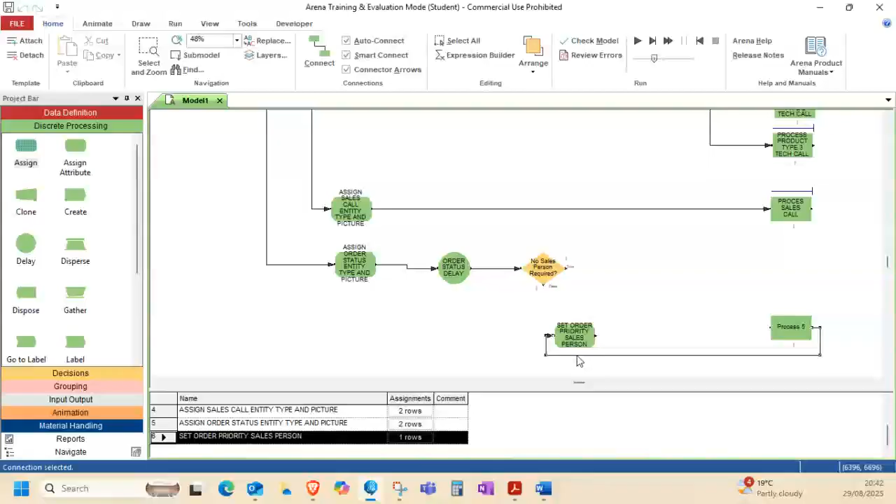Next, we will send entity using a Seize module. You might ask why you're using Seize. So Seize module, after that, Seize, and order status Seize, this sales person, and you add the salesperson. Click OK, and then we're gonna have delay.

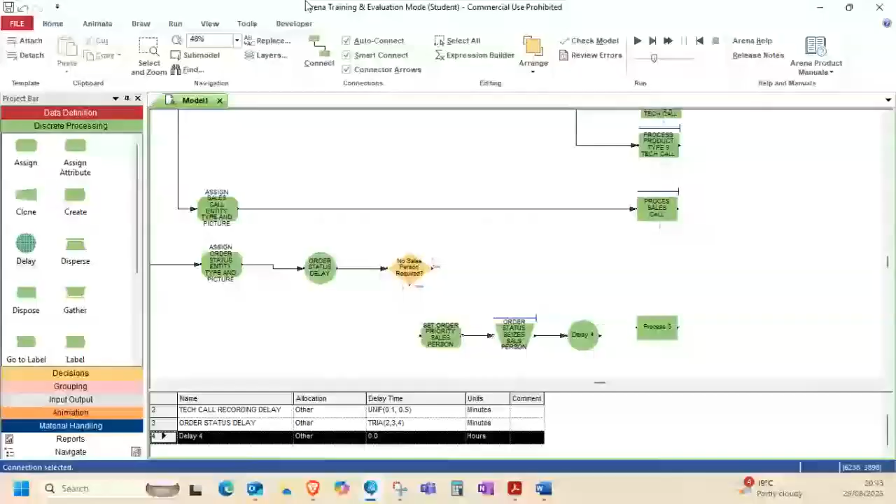Delay what? Order status. Conversation with sales person.

Don't make your names to be this long. I agree, this is for learning purposes, this one.

Then we release this person. We release the salesperson. Order status, release, status call, releases salesperson. What is the resource being released? The salesperson. Then okay, and then

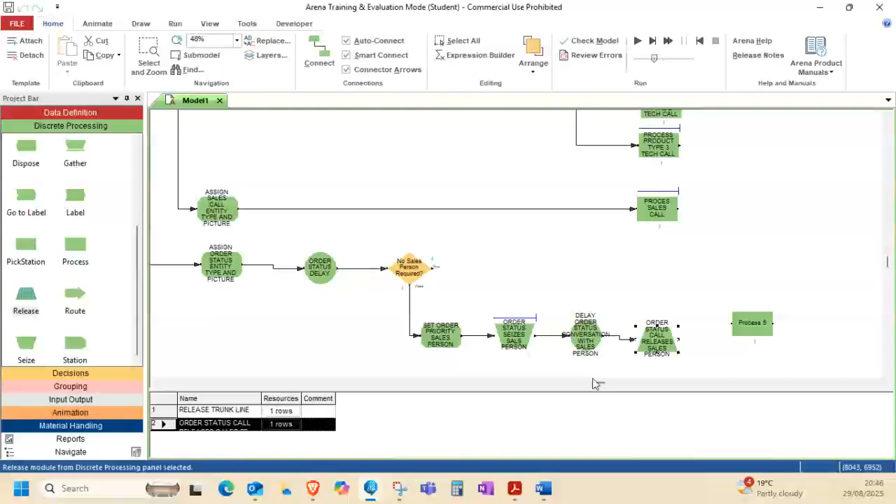Now we're exiting the system altogether. We are exiting the system altogether. We're going to have

Release trunk line. You're going to decrement, increment, decrement, where the number, meaning that when you were adding the number coming into the trunk, you want to make sure that at the end of the day you have that minus.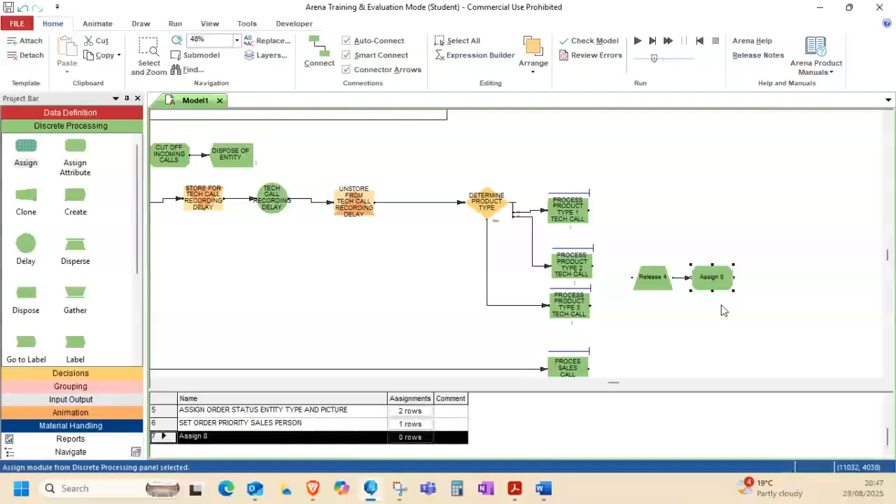You were planning to save 300 patients. At the end, how many did you save? So it needs to say 0 on the other side. So if we have something remaining, that means you didn't do your job properly. There were some items remaining, so that one is going down.

And then you record and you dispose. And you write their names and fill up the details.

Release trunk line. Resource trunk line. So ending call.

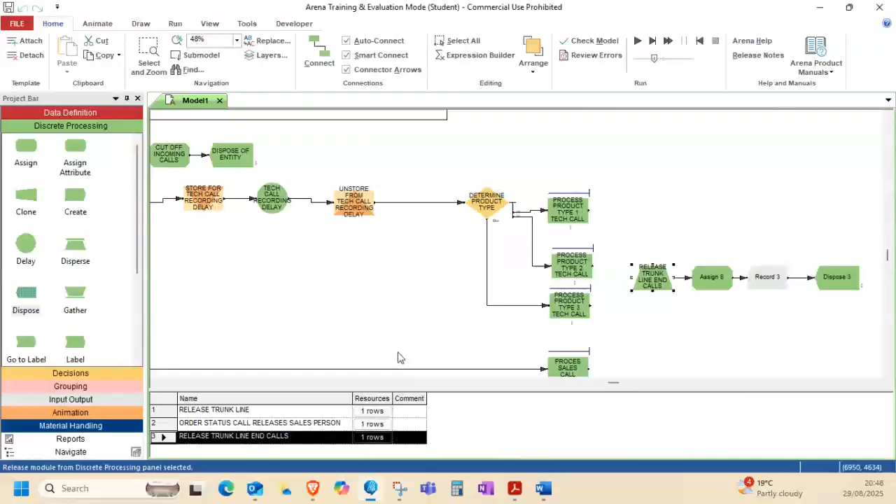So it tells you that you did something wrong. Then now what are you assigning? You're assigning the decrement, increment, decrement, what, active call counter.

So there was a call counter that was counting products coming in. Now we want to decrement it. So it's going to total WIP. And then this is very critical. Then

Total WIP now looks like this, but not just like that. We need to say minus 1. Click OK.

Then what are we recording? All calls, obviously, or record completed calls. Add, what is the name of this? Completed calls.

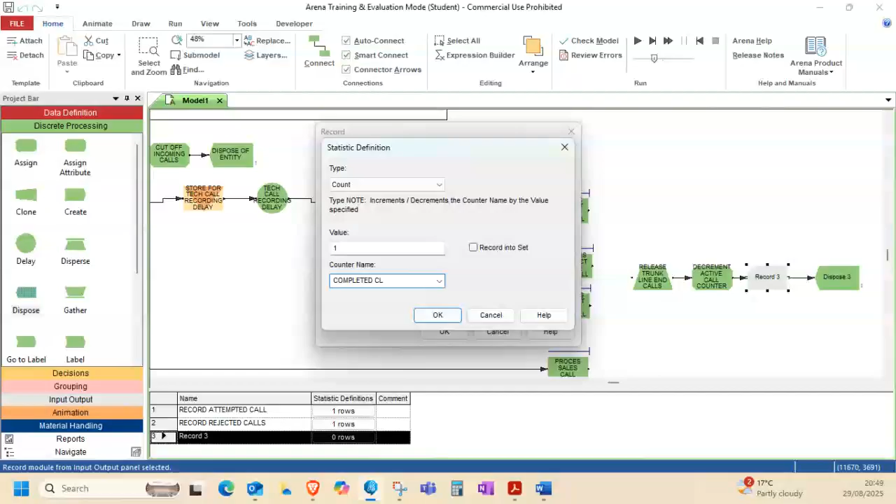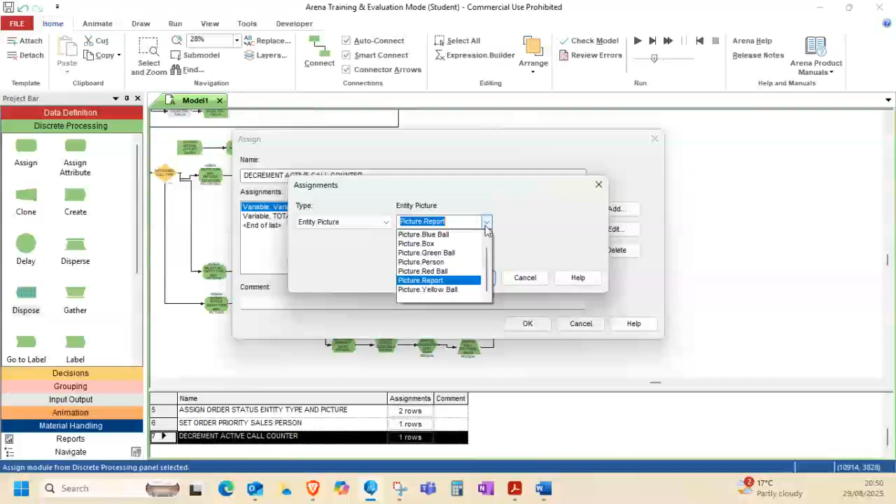Then how do we link everything up? Come here, click that, connect there, click this, connect there, click that, connect there, click this, connect there. I want an entity picture of a human celebrating. And this one goes there.

Okay. Now we are done. We need to go place the terminating condition to say, with run setup, that TNOW equals to equal or greater than 600, and total work in progress is equal to 0. Length of replication is 600.

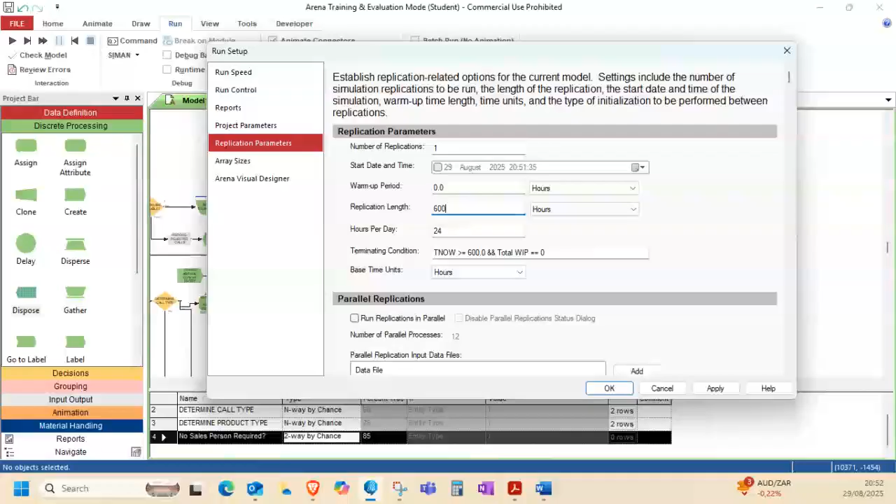Something that I didn't capture right. Okay, if this is the thing, infinite is good. Infinite. Nothing wrong with it. Minutes here. Minutes even here. Apply and then

Call center example. And then obviously save this. Call center exercise.

The issue of saving has always been emphasized. You know how to save. You must save with your own details, no one else's details. No name in your work, no mark.

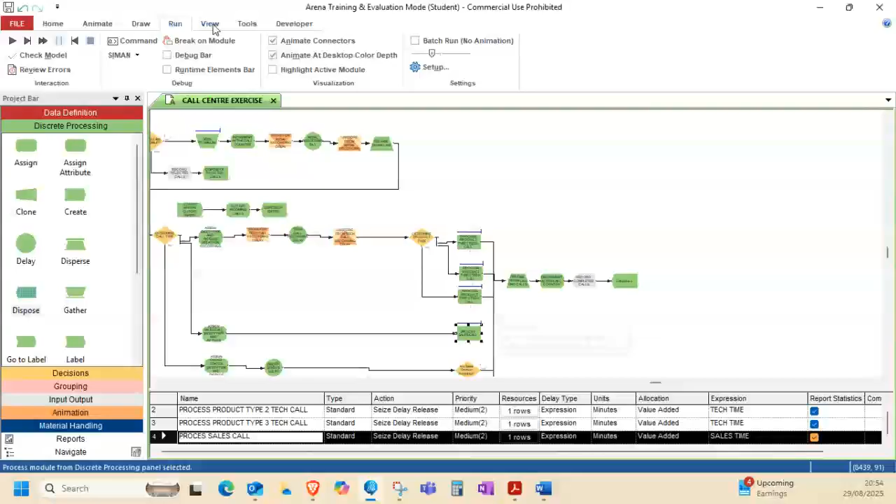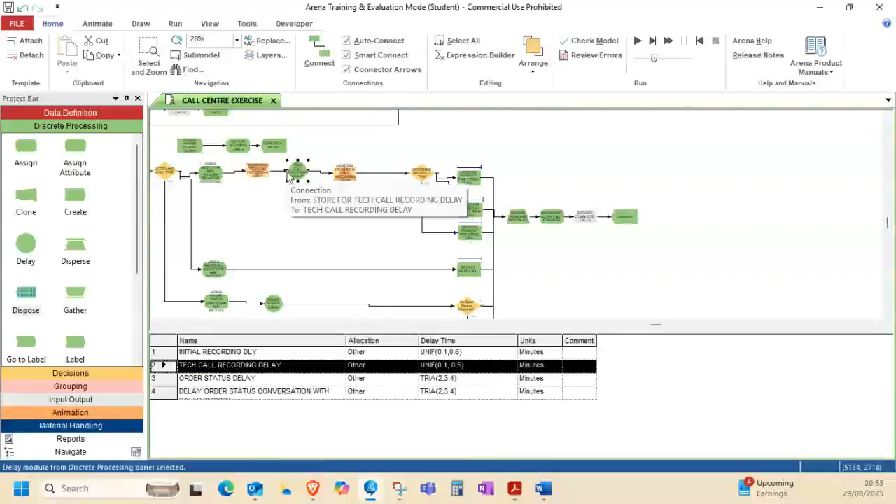Sometimes it's even easy to check certain things. You go there, click, check. Delays, minutes are there, these ones. Yeah, they're all in minutes. And these ones. Okay.

Okay. Expressions there. Resource there. Variable there. Then check for errors.

Once you are here and the time is up, just submit your work, save it and submit. Don't even waste your time. You've done a lot to pass.

A linker error detected while processing outputs: the process product type 1 tech call wait time. A variable or other symbol was used without first being defined.

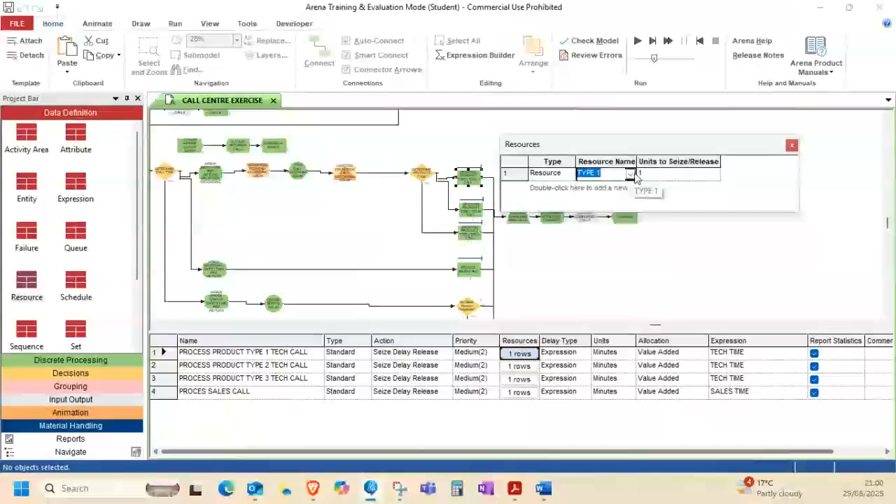Resource. Okay, resource one, type one. Go on the resources. Okay. Here. Yeah, troubleshooting this because of us learning, I have to. This is obviously a resource and it's type 1. That's perfectly fine. 2. Maybe let me change the name.

But it's the same tech call. Expression, tech time. Okay. I'm gonna run one more time. No, not one more time. I was running and running and running until

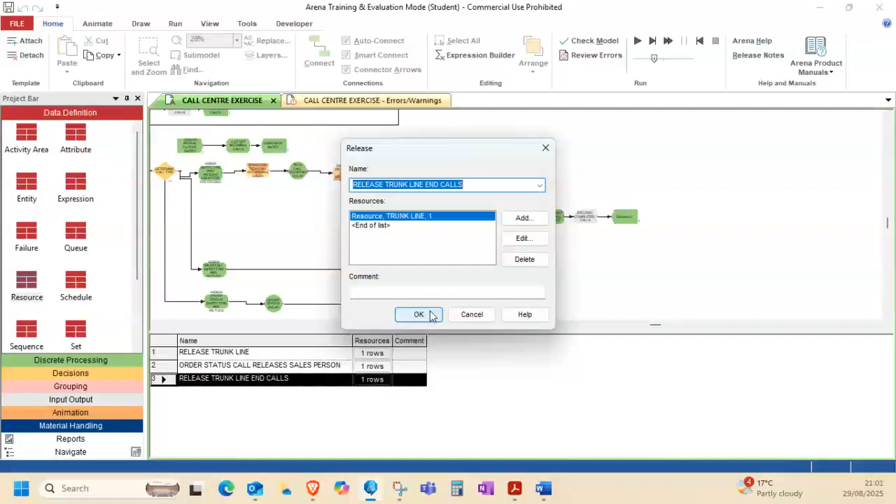this thing. All right, so it's picking up more errors. Release trunk line 1: attempt to release non-busy resource trunk line. Cannot release 1 unit when number busy is 0. Right, you stop and you edit trunk line. Okay, trunk line is supposed to be 26.

But everything else is fine. So you don't want us to do this or what? Trunk line, okay, but it's there. We release trunk line, although we didn't release it to the top there. Because it doesn't appear like it's the first time we're releasing this trunk line. I want to see from the diagram.

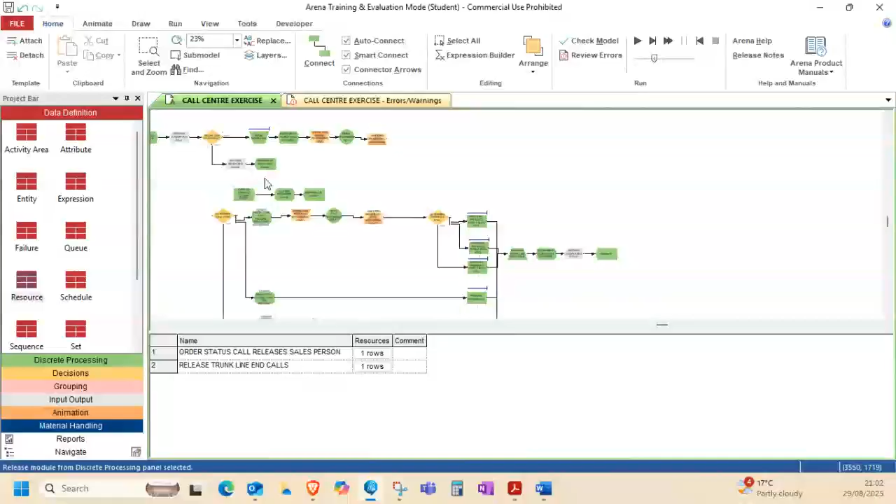Okay, they didn't release it here. Okay, yeah, shouldn't have released it there. That's where my problem was. So that and that, then run.

The black ball becomes red when it's coming here, becomes green when it's going there, becomes blue when it's coming here. So indeed it does change all the colors, which is nice. This is good.

Increase the pace, click yellow, and then your report comes out with your name at the top. I don't have that much of a problem with a report - this will obviously be utilized on your Excel.

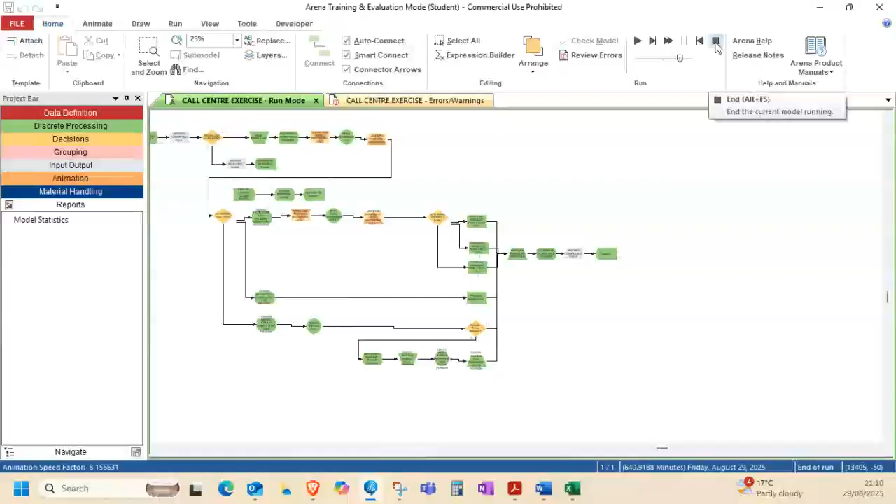And also, you know that there's something - if by the time you finish running, look now, I cannot start because it's still running. So you can see that there's nothing on the system here. That's another sign that shows you that everything we were working with was indeed satisfied. We don't have things hanging. So that's why now we stop - we are ready to run again.

So all the processes, all the sales calls - yeah, everything's supposed to be 0, but yeah, it's something that is of interest.

With further analysis, you must incorporate AI to assist you there and there, so that you can be able to analyze your data nicely and your results nicely. It must tell you what are the things to look out for and stuff like that, and generate graphs, tables, and so on.